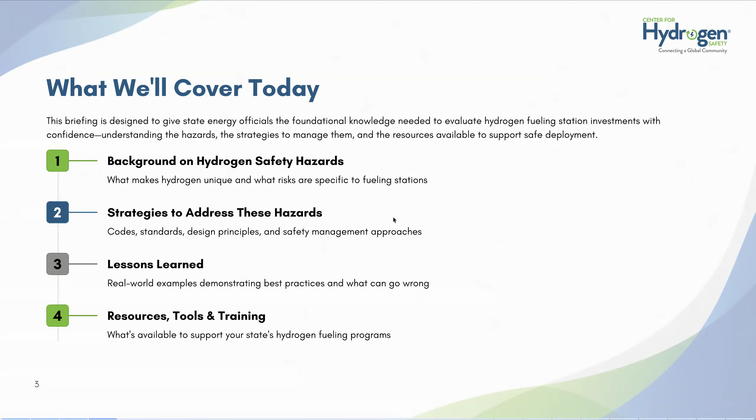Okay, what we'll cover today. We're going to talk a little bit about fueling stations and some foundational knowledge that might be helpful for understanding how to go about putting in a hydrogen fueling station from a safety perspective. We'll talk about the hazards of hydrogen safety first, and then we'll go into some of the strategies to address these hazards. I'll share a couple lessons learned, and then we'll go into some resources, tools, and training materials.

Okay, so while everybody may understand this question, I'm gonna frame it up anyway. Why safety? We get a lot of folks that may not have the same level of understanding towards safety as we do, and so we like to set the foundation and level the playing field a bit. So number one, really to protect workers and communities. We want to make sure it's built safely, that the hydrogen infrastructure does not put anybody in harm's way.

It's also for building public confidence, because if we don't do this well, if we start having incidents and failures, then it's going to reflect poorly on the industry as a whole, not just the one station or facility that it's being put into.

Making sure we do good beneficial use of public funds, that's critical as well. So again, if we don't mind safety, we can end up not getting the benefit of those fundings. Enable the clean energy deployment and then support regulatory compliance. So if you come across anyone that really doesn't have those good perspectives, always good to send them our way. We'll be happy to chat with them on those topics.

All right, well, hydrogen's not new. It's been around for about a century or a little more. You can see some of the numbers here. The Haber-Bosch process was started in 1913. That was to get to ammonia industrial use. We're up near 100 million tons per year right now.

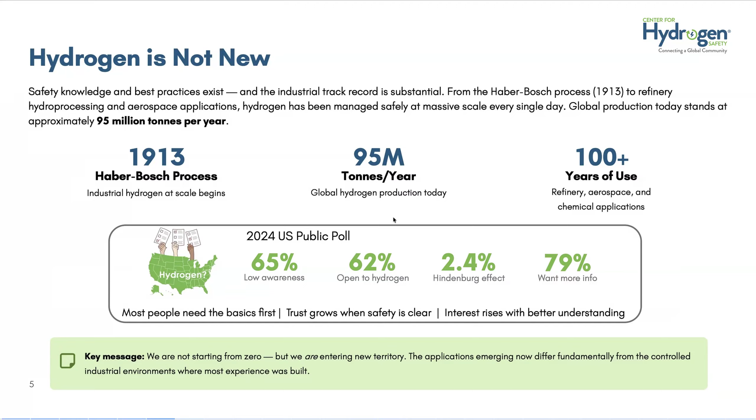I do want to highlight that we're not starting from ground zero, but it is new territory. The applications differ fundamentally from what was experienced in industry for that last century. So all the more important reason why we need to take safety seriously.

Okay, let's look at some of hydrogen's unique hazards. Things like combustion should be obvious. Everybody's aware of this. Very, very flammable range, extreme flammable range for hydrogen. It also has some ability to give off some really excessive pressures when it combusts, and we'll talk about that in a minute. In storage, it's high pressure storage.

Now, this isn't in many ways unique to hydrogen, high pressure storage. But the thing that maybe differs a little bit is that hydrogen, when it's released, tends to increase in temperature, and it also can form jet fires. But if the jet fires don't occur, then it also can form clouds. And so those are the things that make it a little bit more important to understand and consider.

Embrittlement's another one. So hydrogen can embrittle materials, welds, steels, pressure components. The harder the steel, the worse it is. Asphyxiation is another hazard, but this is not really anything different than a common asphyxiant.

Cryogenics in liquid form, the cryogenics, things like cryogenic burns, condensation of oxygen. So that could be a real problem if there's exposed piping or insulation is torn off. And it undergoes a rapid phase change.

So that oxygen enrichment, both from the condensation but also from electrolyzers, is a bit of an important point to highlight here, because if you get into larger electrolyzers, the oxygen hazard actually starts to become much worse than the hydrogen hazard. So really important to consider that if you're looking at those large electrolyzer facilities.

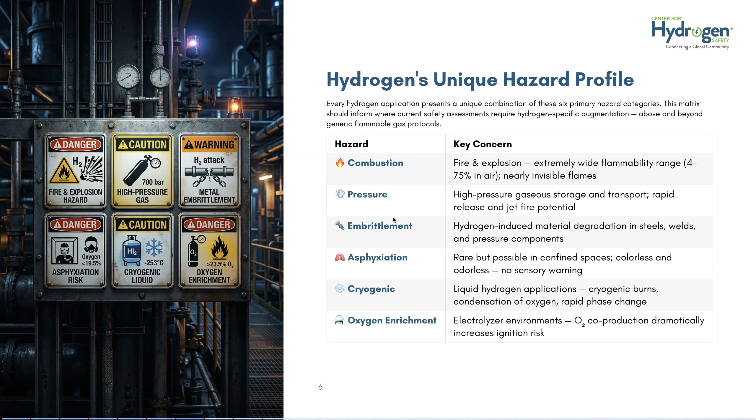Okay, let's compare some properties and see how hydrogen is different. So I mentioned the flammability range. You can see the various methane, propane, hydrogen, both in air and oxygen. Now, we talk about this range being extreme, and it is.

I think the important part, though, is the left side of those bars, because that's where you're most likely to get into trouble, is the lower flammable limit. And you'll notice that a lot of those flammable limits are very similar between hydrogen, methane, propane. Propane actually has a little bit less concentration needed to be a problem as well.

The other thing about hydrogen is under the 10% number, you tend to get flash fires with hydrogen. You don't tend to see those pressure waves developing. There's no downward movement of the flame through the hydrogen mixture, and so it doesn't tend to be as damaging. Up around 10% and higher is when you start to see

those pressures being developed, and you see that burning velocity down there on the bottom. So the burning velocity is about almost an order of magnitude greater than methane and hexane. And the higher the burning velocity, the more likely it is to generate explosive overpressures when confined or in congested areas. There was an incident that occurred back in 2019.

It was a steam methane reformation facility, and they were using it to take that into hydrogen, and then they were storing the hydrogen and then taking it to their customers.

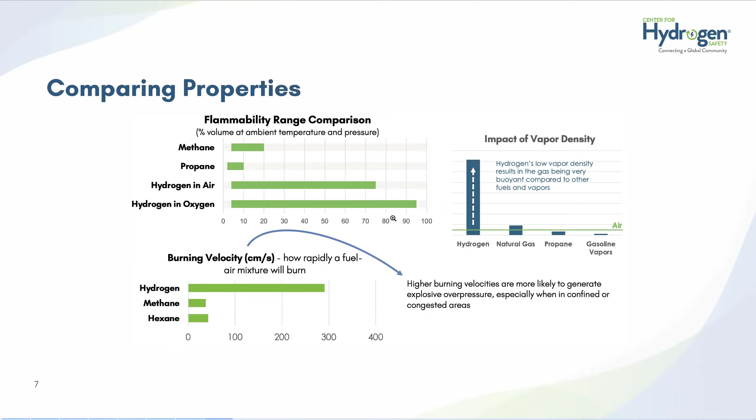Lest you think hydrogen is something really, really bad, I like to show this slide because we've grown comfortable, if not complacent, over most of the fuels that we use these days. So things like gasoline, natural gas, you can see some of the average number of fires at a given time frame, number of deaths, number of injuries, property loss, et cetera. So really the key here is going to be making sure that we do the right things to keep the number of incidents down, but also to recognize that it's going to take some time for folks to acclimate and get more comfortable with hydrogen as a fuel.

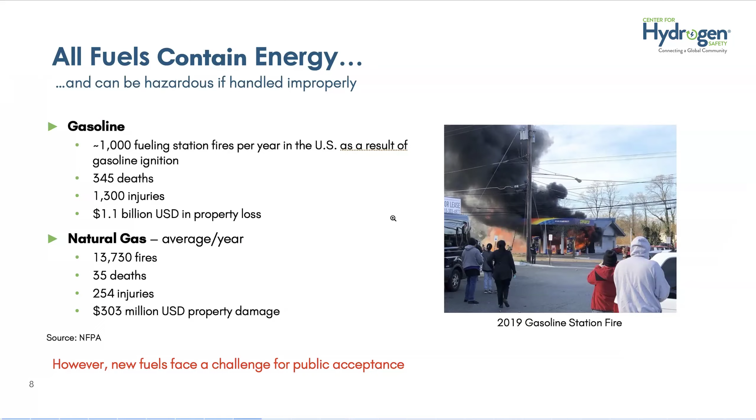So some engineering principles that govern when you think about hydrogen should be obvious, and this is really true for almost any flammable gas. Just keep hydrogen in its pipe. The system integrity, that's really the key barrier. Try to minimize the number of leak paths, fittings, things like that.

And then monitoring for it. If leaks occur, dilute it quickly, but make sure that you understand when leaks are occurring as much as possible. There's lots of different ways to do that. Sometimes you could do it by monitoring the pressures and flows in the pipe. Other times you need spot detectors outside.

Making sure that the ventilation is such that you have, in an enclosed space, low inlet, high outlet, so that as that hydrogen moves upward, it can have an exit path. And making sure that you don't trap any locations as well.

Shutting off the gas at the source. Typically, you would tie your detection in, whether it be emergency shutoff switches or manual detection or automatic detection. You would want to shut these off back at the source, not near where it's being used, because that gives you your best chance to make sure you continue in a safe environment.

Fail-safe hydrogen-rated equipment: we've been in locations where we've done walkthroughs and seen that some of that equipment wasn't rated very well for hydrogen. A nuance here, for those familiar with some of the electrical requirements, is that Group B is what it needs to be rated for, that electrical equipment, not Group C or D. C or D are meant for other fuels. Group B will handle those other fuels, but we've been in locations where they've had Group D equipment in there, and it just doesn't provide protection for the hydrogen.

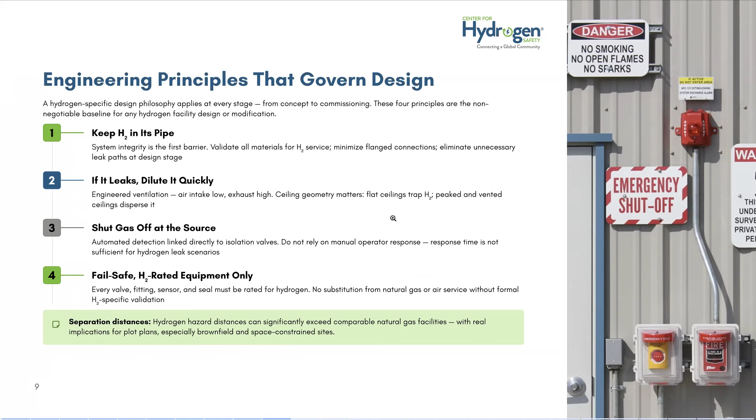So what are the risks at some of the fueling stations?

Leak and release events - while small leaks can accumulate in confined spaces, for the most part, especially with outdoor equipment, they tend to be very minor and insignificant. You get this weeping effect as you go through thermal changes on the system, especially with significant temperature changes year round - the pipe expands and contracts, and that opens up a little bit of a leak point. Usually when that occurs, it's not significant or a hazard that warrants shutting the station down.

It really is a maintenance issue, and they go in routinely and check on those things. Because there's high pressure storage, in the 5 to 10,000 psi range, it's something we need to be aware of. The materials need to be the right selection - I'll show you why that's important in a moment - along with properly designed pressure relief and inspections.

Cryogenic liquids have their own complexity. When they leak, they will turn quickly to a gas. That gas will hang towards the ground for a little bit while it starts to warm up and then move up and away. So it's one of those things where we need to maintain the vacuums, the insulation materials, et cetera. There was an incident at a university in Washington State - they had a dewar inside a lab and didn't adequately assess their hazards.

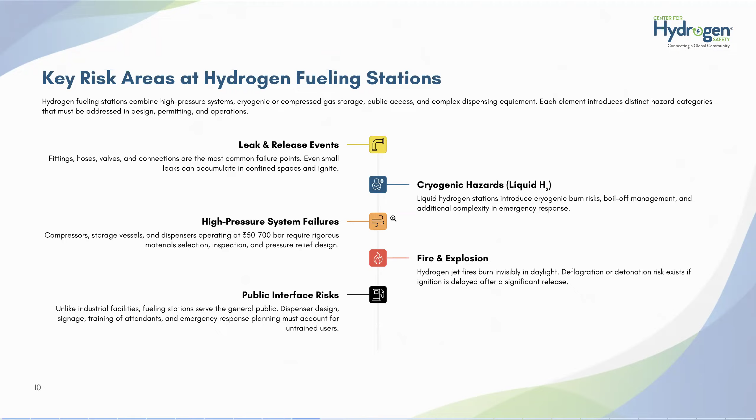Fire and explosion, those can occur. And then public interface risks - this is much different now than what we've been used to. In the industrial setting, it's folks with great experience who understand how to do those things well. Now we're having public interface, and you'd say that shouldn't be a problem because the dispenser's set up to do its thing. That's true, but we've seen instances where somebody has brought their own homemade tank and tried to fill it with hydrogen. It's extremely dangerous, and those are the kind of things we want to avoid.

A couple of incidents occurred, both fueling station related. One was at a bus fueling station - about 300 kilograms of hydrogen was released over 2.5 hours. The cause was an incompatible pressure relief device; we talked about making sure your materials are compatible with hydrogen, and they didn't do a good job there. The device failed, cracked and leaked. There were no injuries, only minor equipment damage, but the fire department was not well trained on the hazard, so they evacuated businesses and homes about a mile out, when it was really just venting out the vent pipe. This really identifies the need for good first responder training and improving emergency communications procedures - there was a lot of miscommunication, no communication, which was a big part of what they learned.

The second one was a fueling station tank leak, fire and explosion. This occurred in Norway back in 2019. It was a high pressure storage tank that leaked and had a jet fire, probably an open air deflagration before the jet fire. The root cause was an assembly error - the inner bolts on the sealing end plug were not adequately torqued, which allowed it to flow out and cause the event. No injuries, minor station damage. Airbags were activated on nearby vehicles, and really it came down to assembly procedures and witnessing verification.

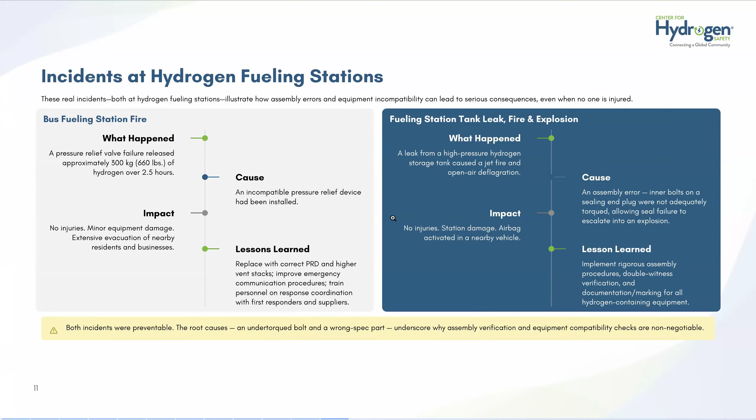Okay, I wanted to point out a hidden infrastructure vulnerability. So what we're seeing here on the top left of this figure is a single source, so you have one vendor supplying hydrogen to the fueling stations.

Some sort of an incident occurs, it causes a disruption. Now with that incident occurring, they have to go back and look at why it occurred, is it going to happen in other locations, etc. There have now been at least three events in the last 7 or 8 years in which the infrastructure for an entire or half of California went down because of an incident, and stayed down for upwards of 6 months.

So something to think about if you're getting into fueling stations is multiple sources and maybe multiple technologies. It'll help you with reliability. Providing more than one vendor, and maybe the way they get to that fuel is different as well, so they're not relying on one method to do that.

I did want to point this out because you've seen, certainly if you've been paying attention to the news in California right now, a lot of drivers can't get fuel and are pretty upset. Some are taking up lawsuits, etc. So the best way to do this is build in redundancy in both the technology and the vendors.

Okay, so planning for success with a project. Let me hit on a few things we've learned over the years. The panel's been doing a lot of work now since 2003, providing an emphasis on safety for hydrogen projects.

If you are going to fund projects in your state, I would suggest that you establish minimum safety criteria, require a safety plan, and emphasize the need for a strong safety culture. Really, really important to minimize the number of incidents. And since you're in control of the dollars, so to speak, that gives you the ability to do that in a way that's meaningful and people will listen to.

I've often heard it said that with safety culture, people will go to what they're rewarded for, and I think that's really true. So if they're not rewarded for bad behavior, but rewarded for good behavior, then they tend to do that good behavior.

Preparing the approval authorities, so education opportunities for the permitting officials and other stakeholders involved, connecting them with some resources. I'll give you some of those later.

Training your first responders, really important part, and you saw at least one reason why that was the case.

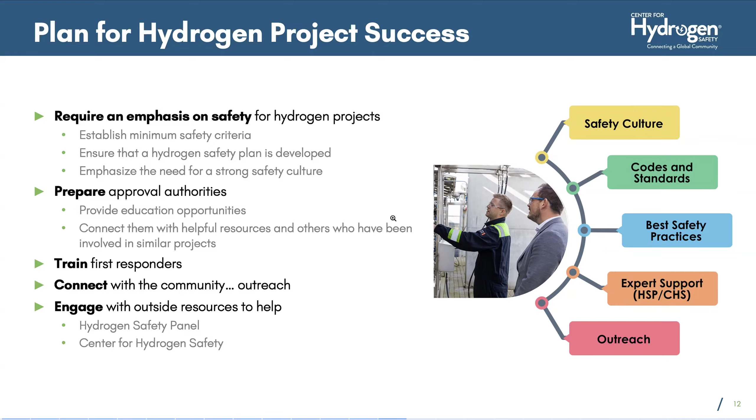Community outreach, we found that to be extremely important. Answering questions, getting in there, understanding what the concerns are will help with public acceptance, and then engaging with some outside resources to help.

Okay, on the regulatory standpoint, these are just a few areas I wanted to point out to think about. Most states are under the ICC codes, meaning the International Fire Code and International Building Code. Those for stations or repair facilities pull in NFPA 2. It's directly required, not necessarily for all applications with hydrogen though, something to keep in mind.

NFPA 2, the Hydrogen Technologies Code, has been around now for a decade and a half, and it's a primary US model code covering hydrogen fueling at stations and siting and those sort of things. Then you start to get down to the standards level, things like ASME and CGA for how to do those things. And then for the fueling, J2601 is a fueling protocol that governs. So you see how these tiers go, covering different parts.

I also want to stress that codes should be the minimum. They should be the floor, not the ceiling. Best safety practices are encouraged and should be promoted, especially where the technology is fairly new and the codes are playing catch-up.

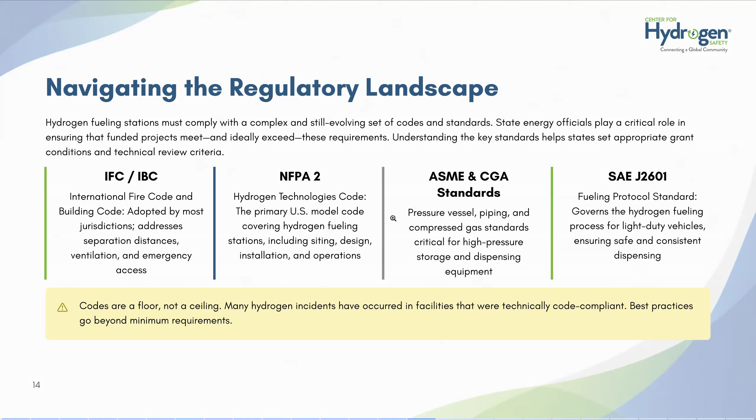Okay, I'm going to introduce you to some resources now. They go from everything public and free to being a part of the CHS membership.

Things like H2 Tools Online, I'll talk about that in a second. There are webinars, these webinars are free the day of the webinar, so I encourage you to be a part of that whenever you can.

We have some training that's online. Some of it is free, all our first responder training is free. Others are behind a paywall, except for laboratories—that one is free as well.

Expert reviews, so the safety panel who I mentioned, I'll talk a little more about in a second. They are available, supporting the state of California and the Center for Hydrogen Safety and the Department of Energy in performing reviews right now. And then certainly being a part of the center helps you connect with resources and people in this field.

The Hydrogen Tools Portal is about 3,500 pages. It's got best safety practices, a library of more than 100 best safety practices. This fall, we'll introduce a new set of best safety practices on blending hydrogen into natural gas piping systems, so that's of some interest.

We have two incident databases, let me call it that. One has a lessons-learned focus, the other is more focused on just what happened. Both are available, and there's over 1,000 records between the two of those.

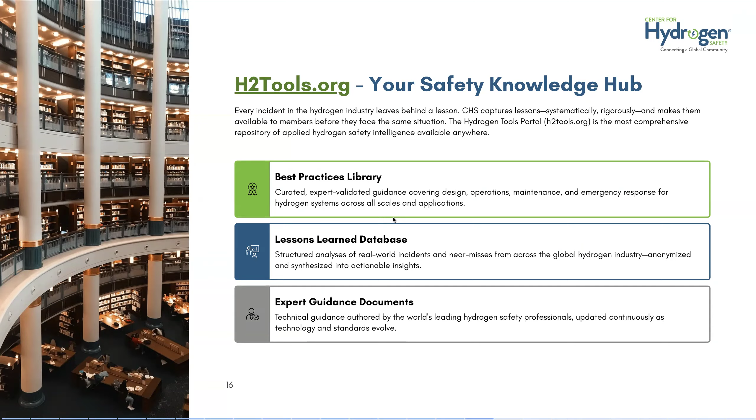So how does CHS help? Well, CHS has a lot of things that can be of assistance. We track incidents - that's one of the areas really of interest to our members - the incident database. We give monthly updates on incidents that we hear about.

We're tracking about 30 incidents right now from all over the world. Some of those have fatalities in them. It's a very diverse set of incidents, although I would say buses tend to stand out as having a few more than others.

We have working groups, and those working groups handle current issues. The blending best safety practices came out of that working group, and we're going to be looking at codes and standards and geological hydrogen coming up.

We do things like safety gap analysis and best practices. We learn from those incidents and try to pivot around what those learnings are. Members are really kept informed on what the incidents are, even if we don't have strong information, as can be understood because of the legal blackout that occurs when an incident happens - we still have folks that understand the equipment and can speak to it, giving some perspective that helps when thinking about what might have occurred.

Training and competency programs - workforce is a big part of where we're headed, needing to get that workforce prepared. So whether you're new to hydrogen or in a different work area transitioning across, some of these programs and resources can help quite a bit.

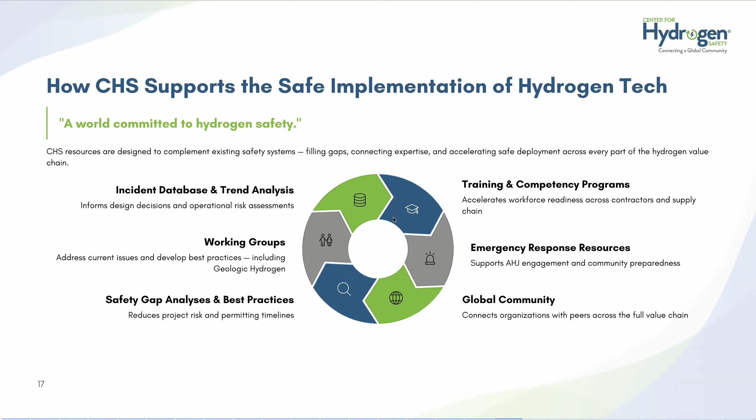Some of the training programs - this one actually occurred last fall in the background - there's things like fundamentals training, and I'll show you what some of those look like. This is our current webinar and e-learning courses, apart from first responder training. First responders have another set of e-learning courses as well, but you can see it's very diverse.

Right now, members are the only ones getting access to those webinars after the day of the event. We give it free the day of, then move it behind the member wall after that. And in things like NFPA2 code training, we have a basic and an advanced, and the advanced is really great to understand some of those issues that are challenging us.

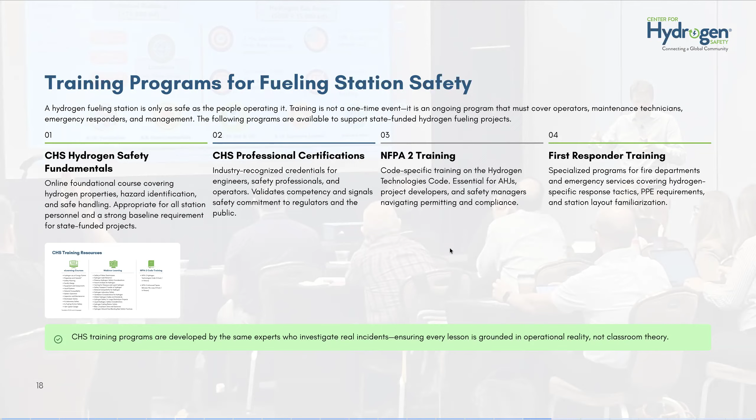We have the ability to get a credential, and we have one credential right now in fundamentals. We're going to be moving toward additional credentials in the future. I mentioned the NFPA2 training, and as I stated before, there's some training for first responders.

This is an actual incident that occurred in California. I want to stress emergency response preparedness, because these guys are facing more and more challenges. First responders, especially in the transportation sector, when they come upon an incident, it's not always clear what fuel is involved. You have batteries, hydrogen, compressed natural gas, gasoline, diesel, and the fuels require a different response depending on what it is.

I'm showing you a picture of this. This was the Diamond Bar incident in California. There was also another incident in California two years ago with a CNG vessel, compressed natural gas, but it's very similar and it's set up to hydrogen. It's a high pressure vessel. Fire department responded to that incident. At some point, they started putting water on the tanks, and the tanks ruptured. The temperature activated relief device did not go off, and nine firefighters were injured in that event.

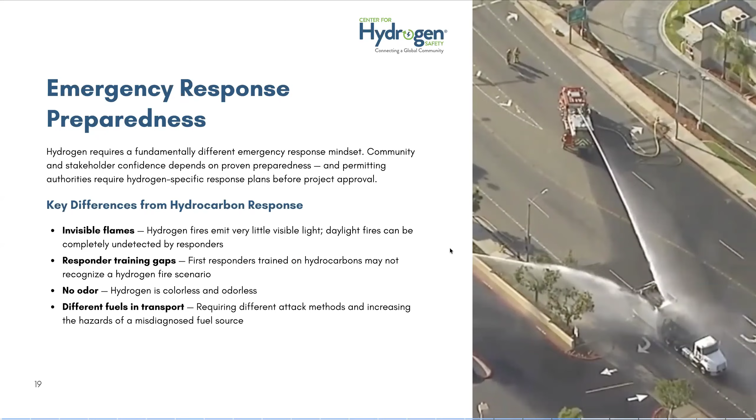In another instance with batteries, there was an incident first responders were at. The batteries were thrown across the ground and were off gassing, and they didn't realize they were dealing with toxic gases being given off by those batteries. So we actually had one fire department say they'd rather deal with hydrogen. That was the department that had the two firefighters who got seriously injured.

All right, so I want to focus on this, a little bit involving the safety panel. Here is a picture of the safety panel. This is in Phoenix, Arizona. The folks all on the left there are safety panel members, so that gives you good perspective and some feedback from these folks on this hydrogen installation.

The panel can provide support for state-funded projects. We do this in California right now for the California Energy Commission, as well as many of the transportation-related agencies. That's a possibility that can be done. There are lots of different ways to do it, and I can certainly answer any questions. It's bringing that very deep 800 years of experience to bear on projects and ensuring that safety is considered.

The panel was actually put together in 2003 to make sure that the rollout of hydrogen would not be adversely impacted by the lack of focus on safety. So it's been evaluating projects ever since, and we're up to, I think, 715 or 20 projects or reviews, over 500 projects.

We're big on providing, looking at incidents. We have panel members paying close attention to the incidents and getting more information. We're putting out white papers and those sort of things as we're able to. There's also grant condition guidance - we've learned a lot helping in California, and that's available if you want us to look at it and say you might want to consider this for safety or that. And stakeholder convening - we've had opportunities to talk and be a part of groups with state officials and others in the stakeholder realm.

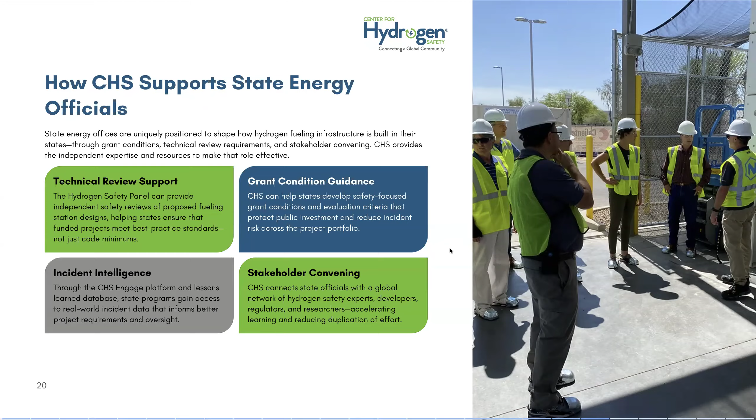Getting down to the wire here, I'll wrap up in a second, but safety planning is essential. It should be obvious by what you've seen and heard. There is a guidance document that is freely available. You could recommend it for your projects. It's been around since 2005, had a lot of road put on its wheels. In 2025, we updated it for process safety management, integrating principles into the guide. So it's set up to focus a little more on the PSM as well as safety culture.

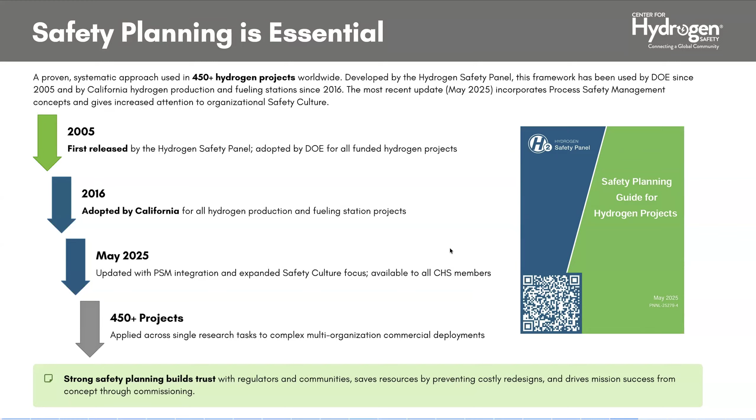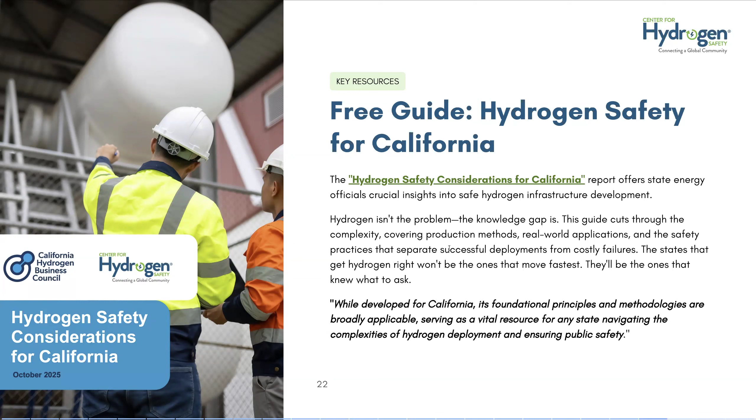I wanted to make you aware of this guide that the Center for Hydrogen Safety and California Hydrogen Business Council put together at the end of last year. It's a great guide - not really just meant for California, but it was funded out of California, and that's why it's got the title on it. It provides great information that can be used for stakeholders and politicians. It cuts through complexity and gets to here are the risks and how those risks are handled, as well as looking at lots of different applications and what needs to be considered for safety. That's available off the Hydrogen Tools portal I mentioned earlier, in the document section.

Also wanted to mention a conference coming up. If you want to learn more about hydrogen safety, we're going to have our next conference in the US in March. It'll probably be our best conference yet. We're including training as a part of it - no longer a separate activity. These comments are out of our last two conferences that we've had, so you can see some great feedback there, and that's just the tip of the iceberg of what we get. Love to have you - if you have any more questions or you would like to present, let us know. Love to see you at this conference next year.

So what are the next steps? Well, for partnering to get the infrastructure off the ground safely, engage with us. We're available for technical support, and we've got a long history of doing that and would love to work with you. Require safety best practices in grants, just reiterating that again. And then if you're able, join the CHS network. The California Energy Commission and NYSERDA are both members of the Center for Hydrogen Safety, so would encourage you on that front as well.

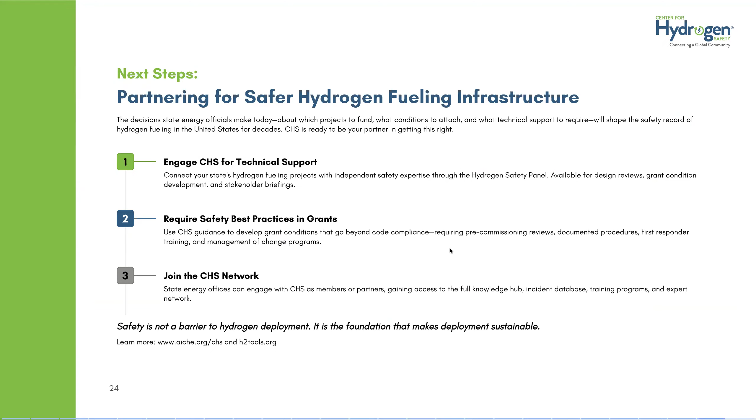And what do you have for me for questions, Grace? Wonderful. Thank you so much, Nick. That was a really helpful overview, and thanks for plugging all of those resources and trainings that are out there. Excited to look into those more. Happy to open it up for questions from the audience.

I see we have one in the chat already from Stephen asking whether NTSB investigates hydrogen safety incidents or if it would be the fire marshal or someone else. So both, and it depends on the incident. The recent Colton, California incident, I think, is being investigated by the NTSB. The NTSB investigated the CNG incident that I mentioned earlier where 9 firefighters were injured. They didn't investigate the incident in Delaware, Ohio, back a few years ago that occurred with a transportation vehicle. So it's a little bit hit and miss, but the really great part is they tend to do thorough investigations.

And the fire marshals get involved in most investigations in their jurisdiction in one way or another. The challenge for all of that is that, especially on the fire marshal side, the state side, there aren't a lot of great resources for those folks to bring into the discussion. So we've been trying to tell people the safety panel is available, CHS is available. Let us know if you would like some expertise to be a part of those investigations. We'd be happy to do it. Another thing you could put in your grant funding criteria is that investigations will be opened up to the safety panel, so we could keep things confidential, but really bring some good expertise to understand why things happen and how to avoid that.